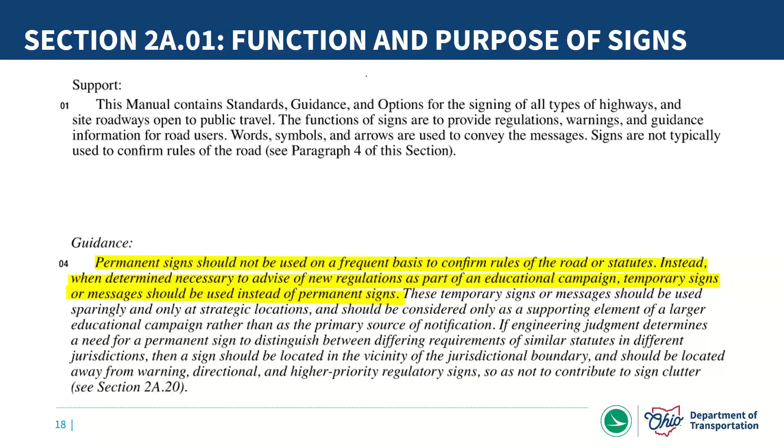Next slide here, this one just looks at the classification of signs. I color coded here with the highlighting. So you've got basically three categories or classifications of signs. You've got your regulatory signs—stop signs, yield, speed limit signs. You've got your warning signs, typically black on yellow or black on fluorescent yellow-green for school areas. And then the third major component is your guide signs—giving you destination information, directions, distance information to particular points of interest, that type of thing.

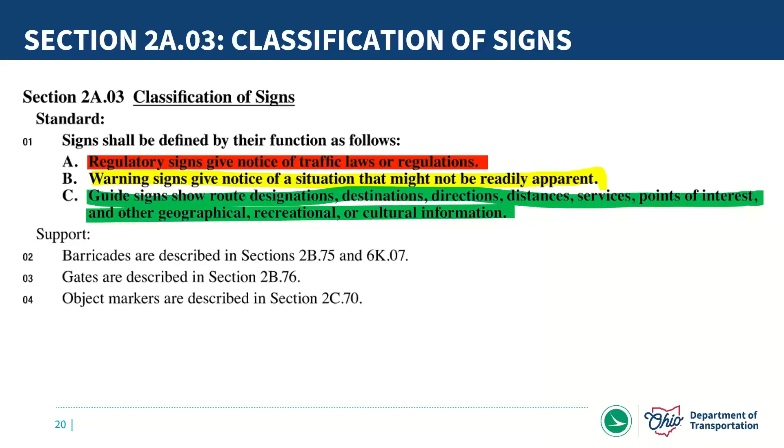All right, moving on—another part of that same design of signs section, 2A04. Pictographs are covered in that section, and the emphasis is you just need to be careful with the use of pictographs. You need to make sure you're reviewing this information if that's something you're trying to do that's not a pictograph already on one of the standard signs provided in the manual. Just need to be careful of that.

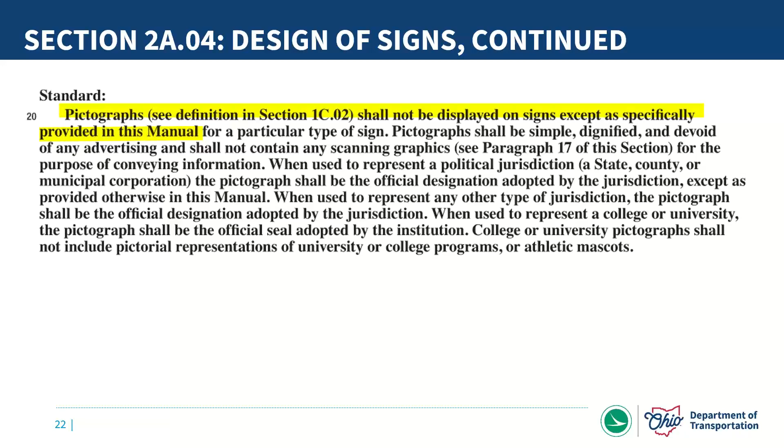The colors of signs - section 2A06 gets into all the different colors designated for different types. Not going to dive deep here, but I pulled this back in from part 1, just as a good refresher to show everyone the different colors and how they've been assigned for different uses.

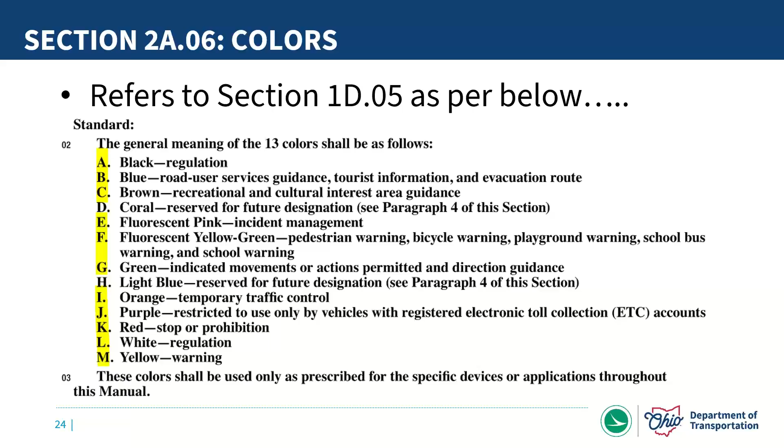This slide again talks about the dimensions of your signs, and this gets into being very dependent on the type of facility you're talking about. We'll take a closer look at some of the tables - there are tables in most chapters listing the different size requirements, which is a really handy resource for determining the size required for the type of road you're planning to put that particular sign on.

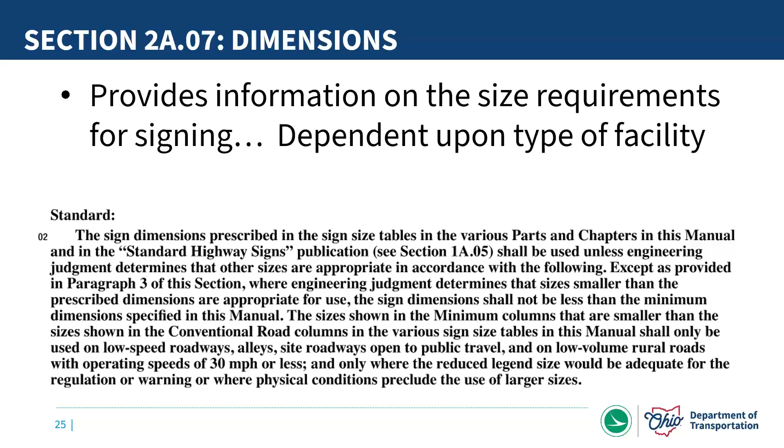Next section we'll talk briefly about is word messages, section 2A08. Nothing too earth-shattering here, it's pretty common sense type information - your word messages need to be horizontal, reading left to right.

The thing I thought was kind of interesting, and I'd never really heard this word, is solidus - I'm not even sure I'm pronouncing it right. So if you want to wow your friends and family, you can say you know what a solidus is. It's a slash - / - I always thought it was just a slash, but I guess it has a name.

Moving on, let's talk a little bit about symbols on signs. What's highlighted here is that standard symbols are typically oriented facing left, however it is permissible to mirror image those symbols if it helps convey information to road users. The example on this slide is a pretty common one you see at pedestrian crossings - on the left side you've got the mirror image, on the right is your standard orientation, just conveying that pedestrian traffic is actually walking out into the crossing area. You don't have to do this, but it is an option and it is permissible.

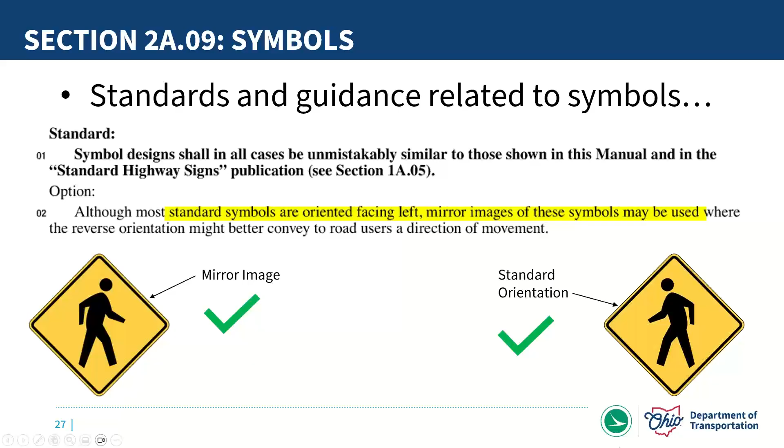Sign borders, just real quick - this section says your borders need to be the same color as the legend with distinct shapes. As far as the corners, all signs with the exception of stop signs are supposed to have rounded corners. Again, nothing here is any kind of significant change from the previous version of the manual.

Section 2A11 gets into enhanced conspicuity for signs. The real message here, if you dig deeper into this section, is there's a lot of mention of the use of engineering judgment - we talked in session 1 about the differences between engineering study and engineering judgment, so that's kind of the key takeaway here. If you start throwing enhanced conspicuity on practically every sign out there, you start to lose the effectiveness. So you want to give some thought when considering adding these additional items to make signs stand out, and make sure you're doing it for the signs that need it the most, not just every last sign or a big portion of them.

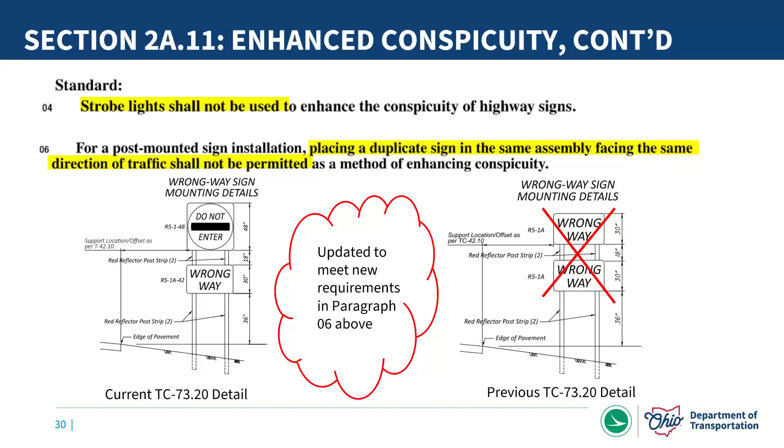Next section here just talks a little bit about the use of LEDs for conspicuity. The info I have highlighted here, and throughout this presentation, I pulled in some of the language from the MUTCD and or the Ohio Supplement. Obviously it would take way too long to read through all that, and nobody wants to hear me drone through that anyways. But I did try in some of these slides to highlight some of the things I felt were key pieces of information, or at least talking points as we go through this.

Next slide here, just want to take a look a little closer regarding that conspicuity. This slide is showing an example of a sign that does not actually meet the conspicuity requirements. In this particular case, the stop sign, what the manual is talking about, and I've got it highlighted below in the slide, is that there needs to be an LED along each edge of the sign in addition to each of the corners. So in this case, this stop sign would need some additional LEDs in between each of the corners to meet that requirement.

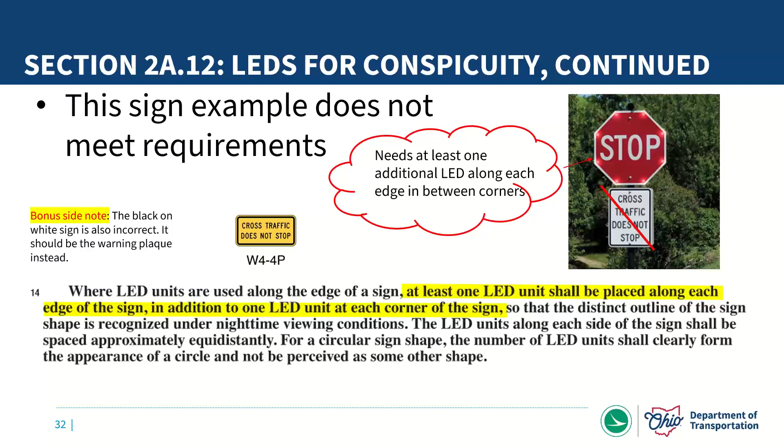Moving on, in 2A13, this gets into the standardization of location. What I highlighted here, and you're going to see very quickly that this is a theme throughout, is that there is definitely concern and a lot of emphasis in the manual about overloading road users, or in other words, sign clutter out on our roadways. It's an emphasis area in several sections of the manual, so you're going to see it here and in several other locations. It's definitely something to be thinking about as you're working through signing, getting the signing out there on your particular routes.

Here is just this slide. I wanted to pull up these couple of figures, 2A2 and 2A3, which are really good examples to show location as far as vertical height as well as offset locations. So some good reference information there.

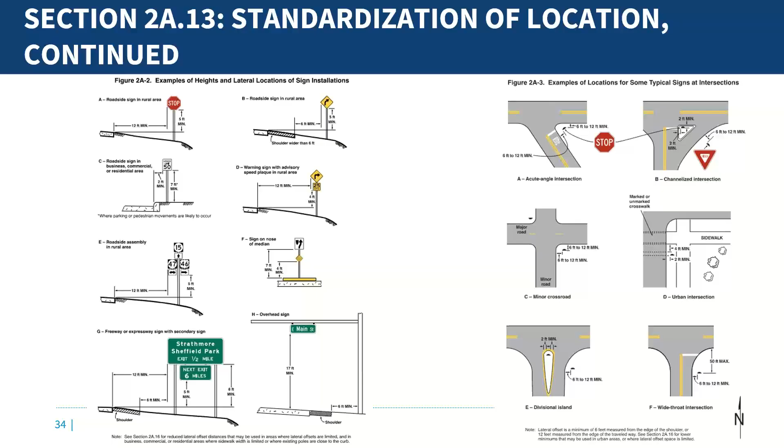Next section, next slide here, 2A14, talking about overhead sign installation. The manual gets into, there's not any standard language in this section necessarily, but there is some guidance information. And then there's also this option paragraph 3 that kind of lists out many of the scenarios where overhead signs are beneficial. So I just wanted to point that out to folks.

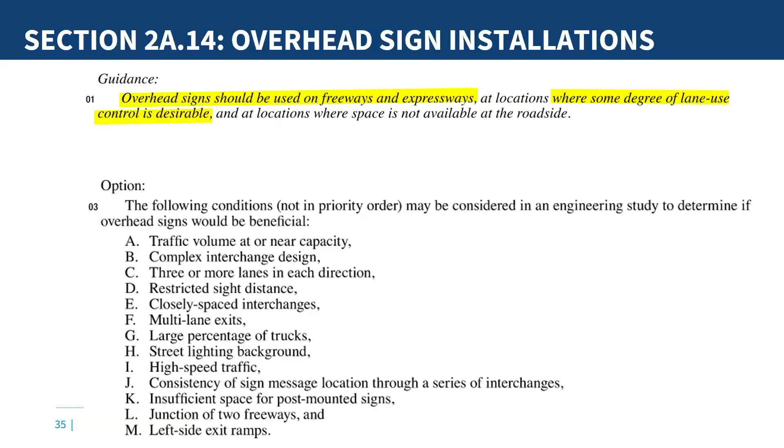Next, real quick, let's look at lateral offsets again. Those figures we saw a few slides ago do a good job of giving you the basic information, and this section dives much deeper into it. I wanted to point out the highlighted info here: post-mounted signs and object markers need to be crash worthy if they're within the clear zone. This is very important for keeping sign installations safe in case of a crash where someone goes off the roadway. Also, our TC standard construction drawings, TC 41.10 and 41.20, show in more detail the ODOT requirements for post and beam support type information.

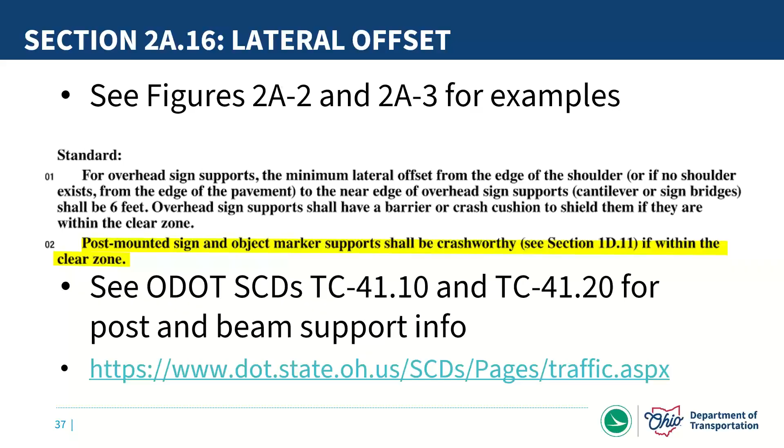Moving on to posts and mounting. What I highlighted on this slide is reiterating that when you're getting signs installed, with any posts or mountings or additional things on those signs, make sure you're not inadvertently obscuring a sign, like a stop sign, so that people can't see its actual shape, because that is very important information for drivers.

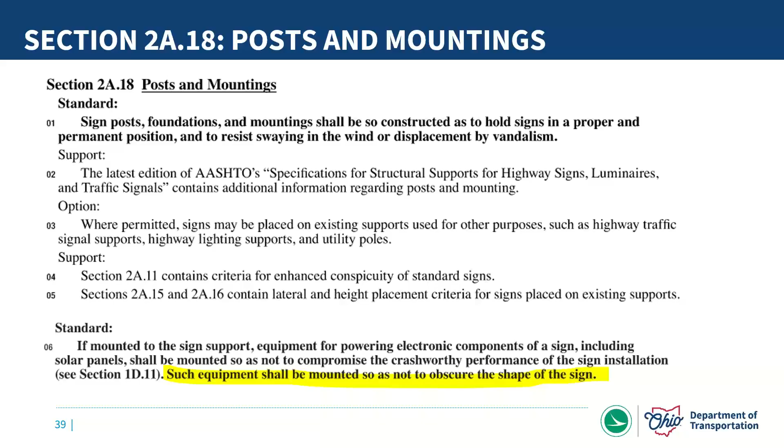Section 2A20, again like I said previously, this will definitely be a theme - there are multiple slides and sections of the MUTCD that get into this - talking about excessive use of signs. I want to reiterate that the previous section, 2A13, gets into the priority of signs and recommendations for folks to prioritize different types of signs, with some type of process in place so you can avoid sign clutter type issues.

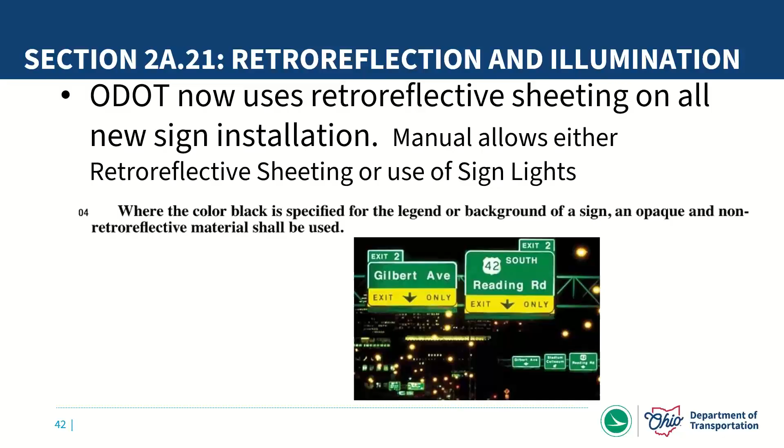One other bonus piece of info you might use to wow your friends and family at your next cocktail party: the unit of measure for retroreflectivity is candelas per lux per square meter. Hit them with that and they might tune you out completely, but that's how retroreflectivity is measured for signs - it's a different unit of measure than when you talk about pavement markings.

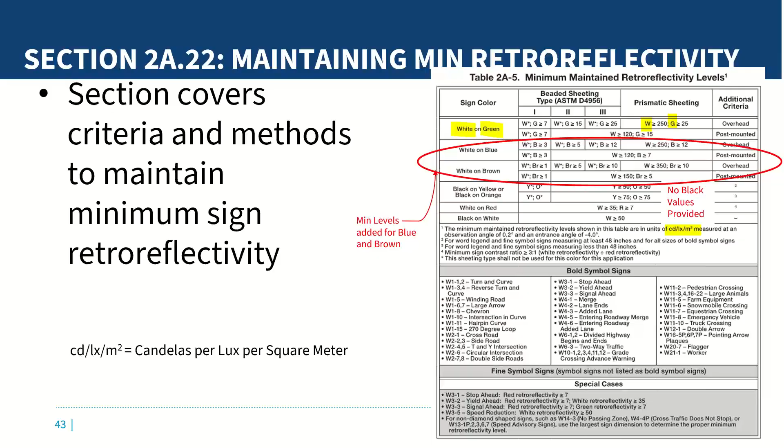Moving on, we're going to jump into Chapter 2B. For the remainder here, at the beginning of each chapter there will be a slide that shows all of the sub-chapters or subcategories within that chapter. If there is content that will have a slide associated with it, those are going to be highlighted pink. If there is a section that is in the Ohio Supplement, that'll be highlighted yellow. For every portion of parts 2 and 3 that are in the Ohio Supplement, there will be a specific slide that digs a little deeper into that and shows what that is, and maybe talks a little bit about why that is.

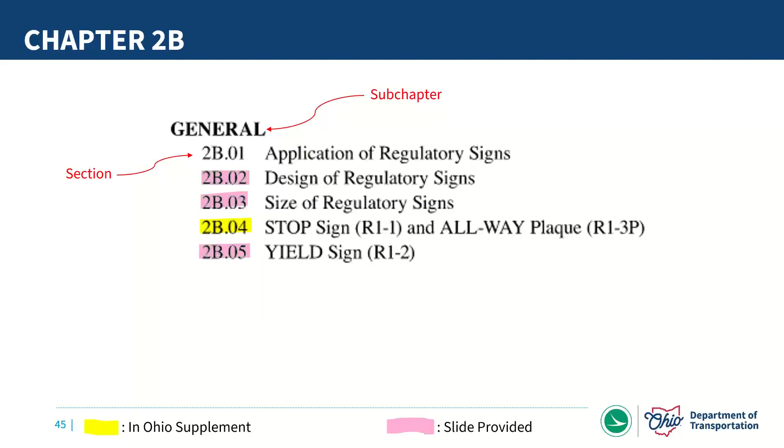So moving on, section 2B02 gets into the design, and in this chapter 2B we're talking regulatory signs. Nothing too earth-shattering here, but I wanted to highlight that if you are incorporating any regulatory signs in changeable message signs, we have that technology now to display full signs on your changeable message boards. You need to make sure that if you're doing that, those signs are set up and sized appropriately, meeting whatever the typical sizing, shapes, and colors need to be for a message board type application.

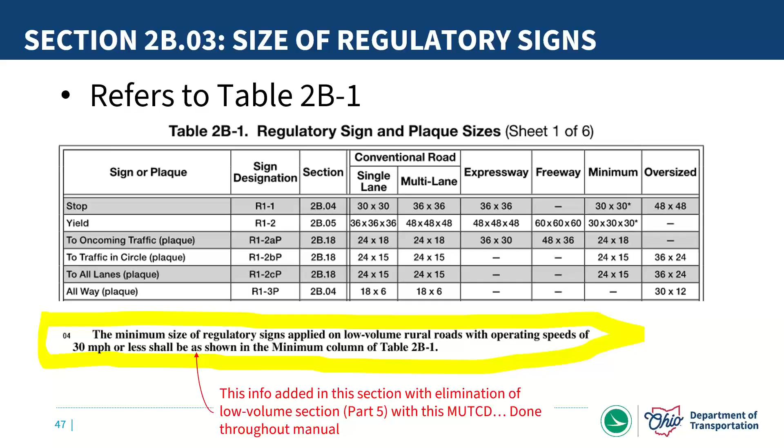Section 2B04 actually gets into a section that is in our Ohio Supplement. A couple things I wanted to point out about this particular section. Of all the regulatory signs, stop signs is the one sign, I believe, in the manual that is not permitted to be part of a changeable message sign. That's new content added, since advanced changeable message signs were just kind of coming online back with the previous manual. So just be aware, stop signs are a no-go on changeable message signs.

As far as the Ohio specific content that's in section 2B04, that has to do with our ORC, Ohio Revised Code, section 4511.43, which restricts any kind of turn at a stop intersection. So the EXCEPT RIGHT TURN plaque that the MUTCD talks about is just something that, based on Ohio law, doesn't work. So we took that section out of the Ohio Supplement.

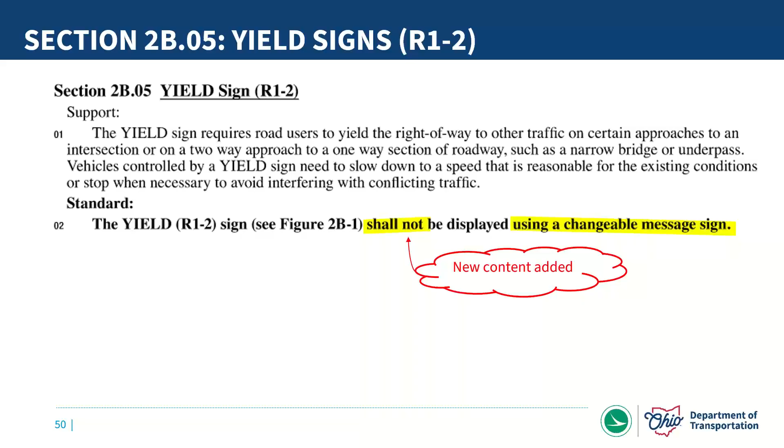Just to clarify, moving on, this section is basically signing for right-of-way at intersections. There's some pretty important information in here, so we're going to hit on this with slides for all of these. We'll probably move through these fairly quickly to keep things moving, but I do want to hit on them briefly. As far as general considerations, the thing to point out here is in paragraph 4.

It lists off the different types of right-of-way control, from least restrictive down to most restrictive. So as you're taking a look at your different unsignalized intersections, this gives you the criteria to be taking a look at, again from least restrictive to most restrictive.

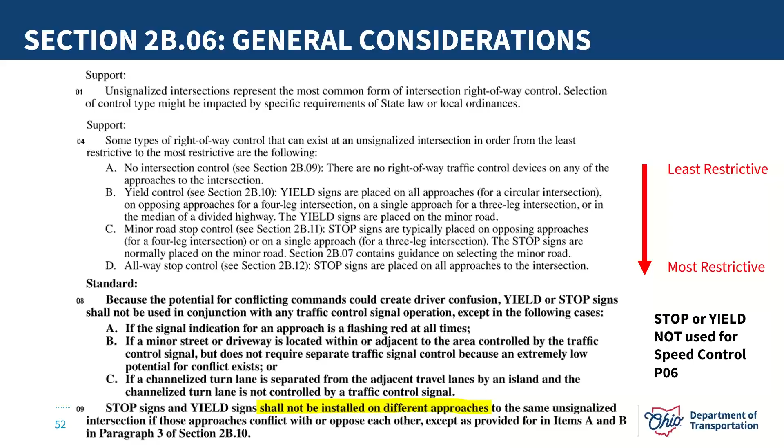2B07 talks about your determination of the minor road. I'm not going to read through all of this, but when you're looking at your unsignalized intersections and trying to determine your traffic control type, this is some of the information you need to go to.

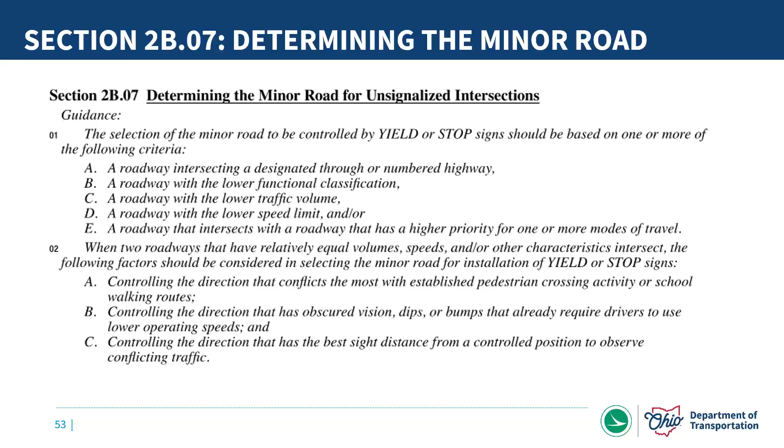Similarly here, your right-of-way at different intersection controls and the considerations. This is a partial list. It's an even bigger list that's in the actual manual when it gets into this topic of right-of-way at intersections.

The next one talks about the use of no intersection control, and again it's based upon engineering judgment, and this needs to be also based on some of the factors listed here on this slide. Not going to go through all of those in the interest of time, but this section is definitely a portion of the manual that folks determining traffic controls at intersections need to be aware of.

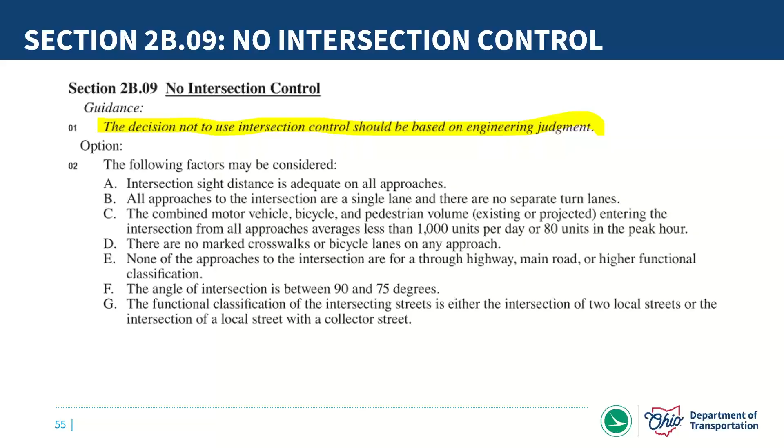This section talks about your yield control, and again most of these sections discuss the use of engineering judgment. Also wanted to point out that yield signs are not to be placed on all of the approaches to an intersection. The only exception to that is roundabout type intersections.

Here, minor roads, your minor road stop control. Again, just pointing out, it's like a broken record here, but engineering judgment, the manual, it's a very important consideration. Engineering judgment needs to be part of your decision making.

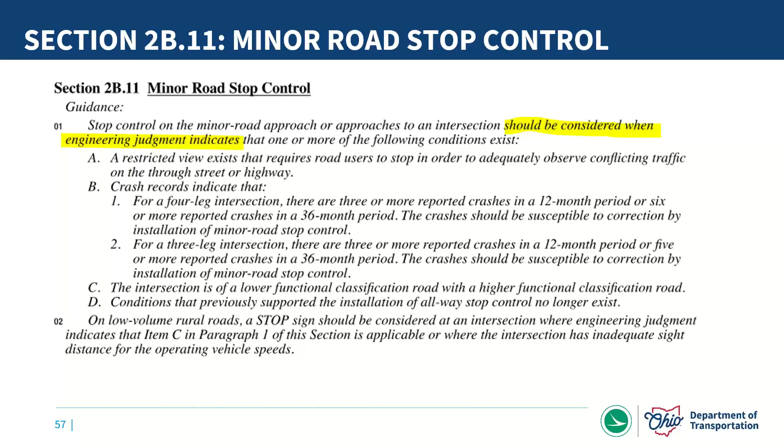Then this section, 2B13 through 2B17, I just listed those off real quickly, and wanted to point out that the new MUTCD does reorganize some of this information when it comes to these warrant criteria. So just be aware of that.

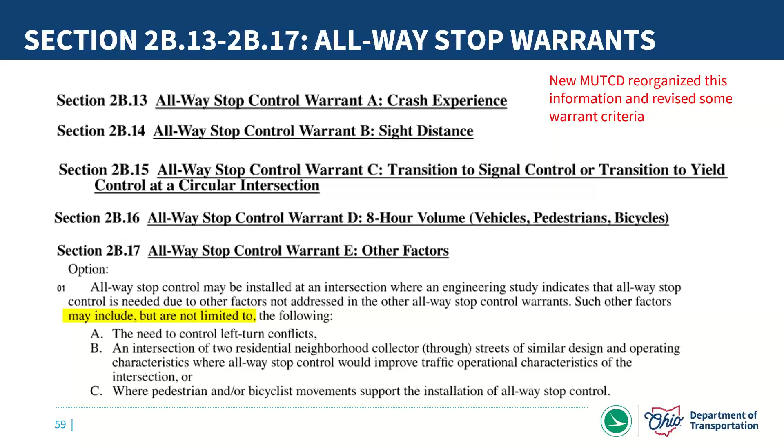Section 2B19 is in the Ohio Supplement. This section gets into Ohio's approach, as far as yielding or stopping in interactions with pedestrians. Ohio, the way the law is written, is a yield state. Some states are stop, some are yield. So what we did here is take out the mentions for signs associated with the stop condition, which is why this information was pulled over into the Ohio Supplement.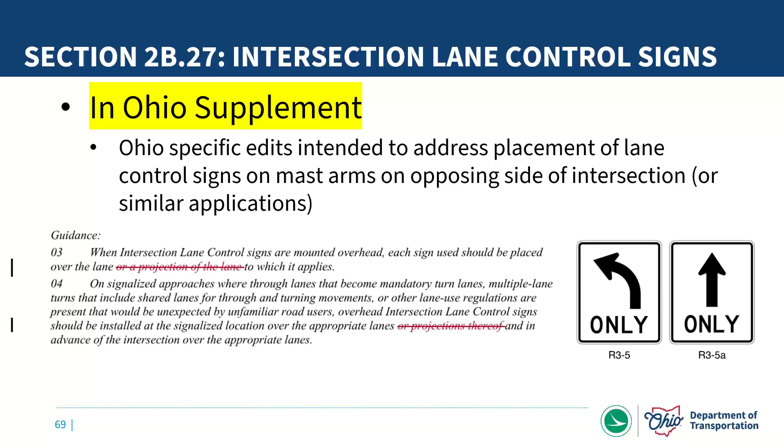Similar here, the same type of thing. We also want to clarify the prohibition of placing some of these types of lane control signs at the far side of the intersection. So it's the same reasoning that this section is in the Ohio Supplement as the previous section. This next slide will illustrate that.

Again, this section 2B29 just gets back into that again, talking about mounting of these on the far side of the intersection.

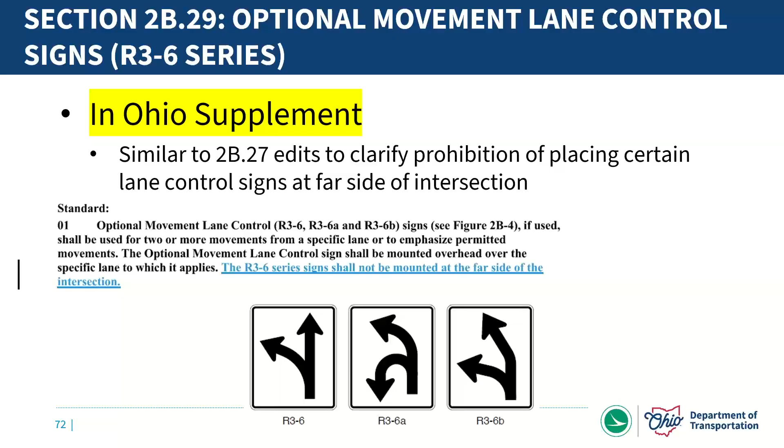Something to point out here is that with Revision 1 of the National MUTCD, this section being part of the Ohio Supplement will actually be going away. We'll be getting that updated because they made that change with their new revision.

Moving on to the section on passing, keep right, and slow traffic. Just one section I wanted to hit on here, 2B38. And also just to point out real quick, there is a new section here, 2B44, new to the manual.

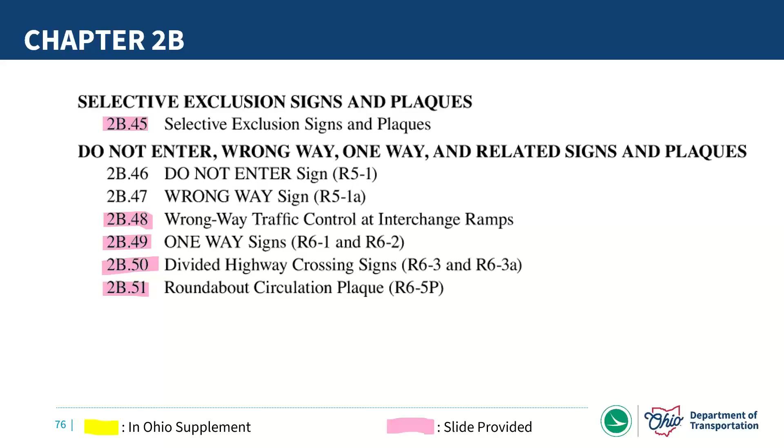Moving on, we'll talk some about selective exclusion signs, and then move into the subsection that gets into your do not enter, wrong way, one way, etc. signs and plaques. So we've got a handful of slides to hit on here.

This slide talks about your selective exclusion signs. The point here is to note that it's important there is a state or local statute or ordinance in place before you go out and put these signs up. In other words, just by the act of placing some of these signs doesn't make them enforceable. Sometimes we do get that question come up from time to time, so I wanted to point that out.

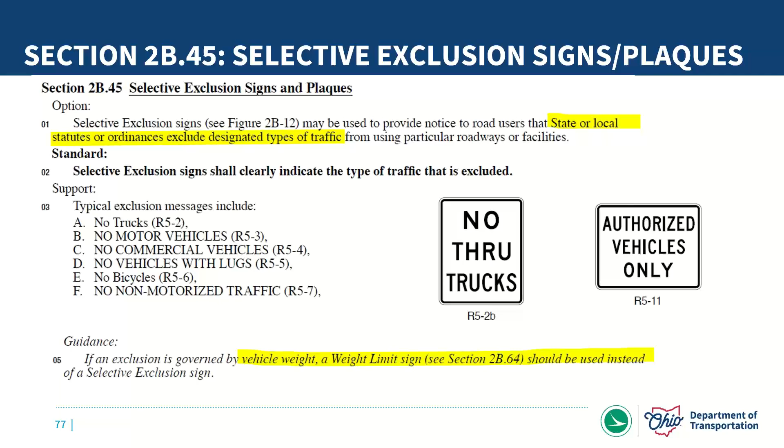Section 2B48, I put this in here because it gets into the treatment of wrong way traffic control at your interchange ramps, and I wanted to point out that we do have an ODOT standard construction drawing, our TC 7320, that provides a typical layout for the signing associated with that. Also, that standard construction drawing isn't used at every last interchange. You need to exercise engineering judgment or an engineering study to make sure that is an appropriate location for those additional signs.

Section 2B49 and 50, again, just some of the other signs that this section covers: your one-ways, your divided highways. This refers back to the section that talks about how to determine how you treat a divided highway, with regard to the traffic controls, whether it's a single intersection or two independent intersections, depending on some of that criteria.

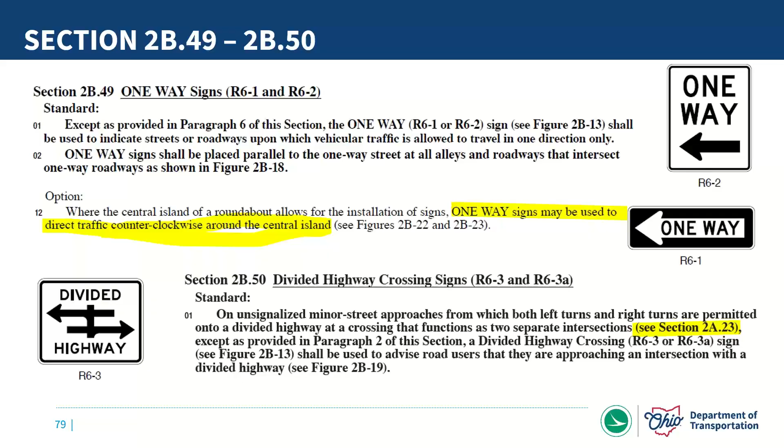Moving on within Chapter 2B, we're still talking regulatory signs. So we're going to talk a little bit about parking, standing, stopping signs, and then also some pedestrian signs. We've got one section that is in our Ohio Supplement, that's 2B53, and then a few other slides we're going to look at as well.

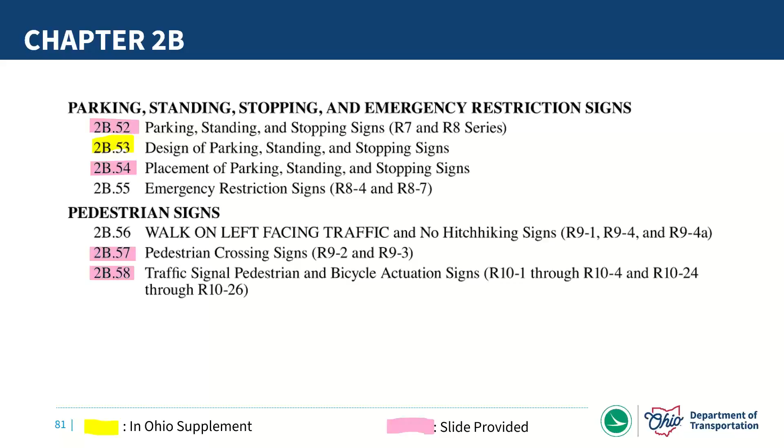So, parking, standing, and stopping signs — this gets into some of the signage associated with those issues.

Moving on, 2B53 — this one is in the Ohio Supplement, and the reason being is that ORC, Ohio Revised Code, has some specific requirements for fines associated with reserved parking for handicap spaces. There's some specific requirements for fines, so we have an Ohio specific sign, and we address that in this section.

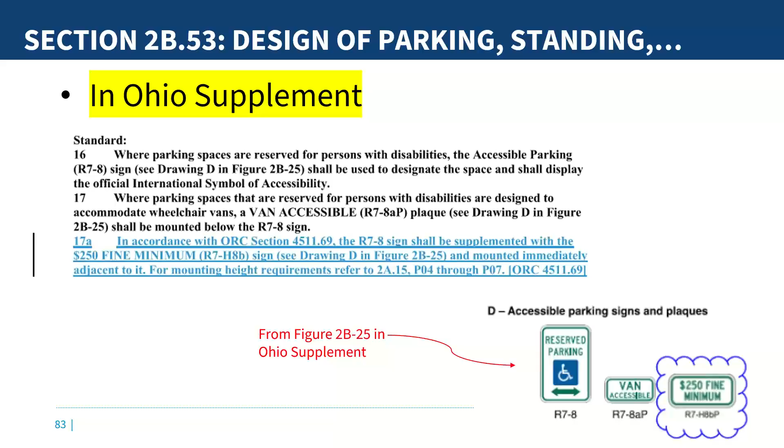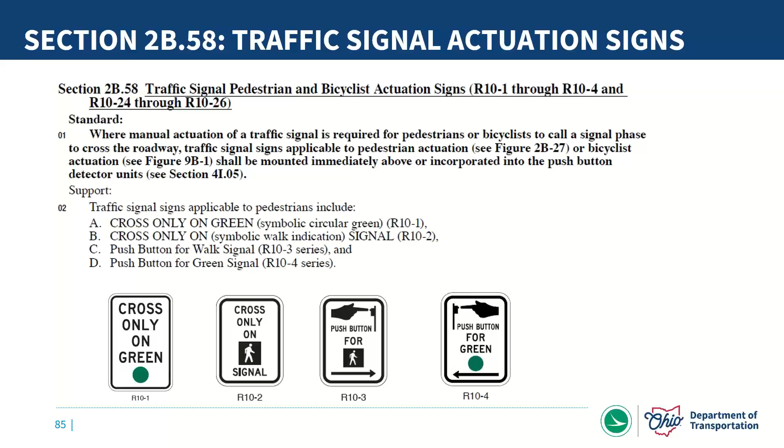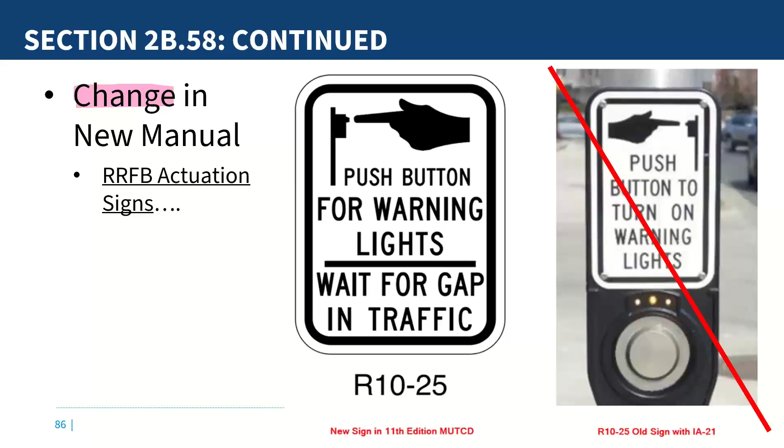Moving on, getting into traffic signals and then some of your road closed, weight limit type signs. We've got 4 sections here that are part of the Ohio Supplement, and a couple others we'll take a quick look at with some slides.

2B59 — this particular section is in the Ohio Supplement, and again the reasoning for that is the right of way of pedestrians and how the ORC handles that, and the fact that in our state at least, we would not be using stop signs, we'd be using yield signs.

Another thing that was added to this section is paragraph 13A here — this is a sign we wanted to specifically call out that in cases where we've got flashing yellow arrows at our signals, we want this sign installed at that signal location for a minimum of 5 years. That's because, as more and more of these flashing yellow signal locations are out in the field, we want to make sure the signage goes along with them, since it's still a relatively new thing being done here in Ohio.

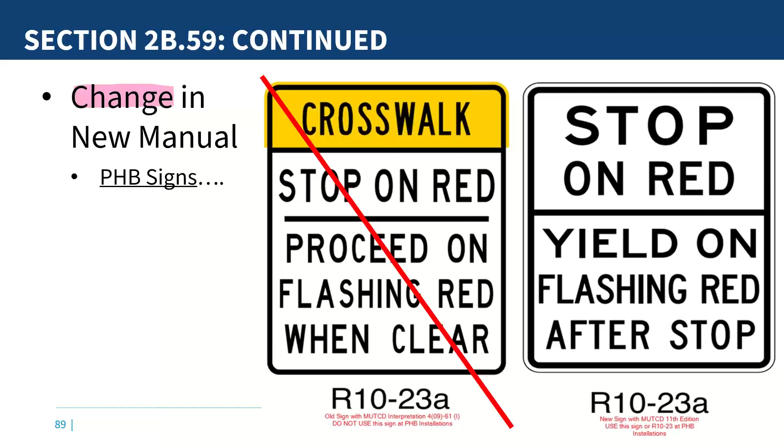This slide, looking at 2B60 and 2B61, really just points out the use cases for the no turn on red sign, with the symbol and without the symbol, and when each is intended to be used. Also, on the left-hand part of the slide, if you look back at the previous manual, these signs did not change, but what did change is the sign code associated with them — for some reason these were flip-flopped between the previous manual and the new manual. So just something to be aware of.

2B63 — this is also Ohio Supplement content, and this one gets into the Ohio specific sign we have for use when you've got high water situations. Again, for more detailed information on these Ohio specific signs, we want to direct everybody to make sure they're checking those out in our SDMM.

Section 2B64 gets into weight limit signs, and this is important. It's in the Ohio Supplement, and this particular sign is new, an Ohio-specific sign. Based on feedback from our colleagues at FHWA, we had to work through this to make sure we provided a sign that met their requirements. So this is the sign we ended up with for Ohio-specific weight limit signage. If you've got posted structures, you need to be aware there is a slightly different sign, and we're going to take a deeper dive into that here.

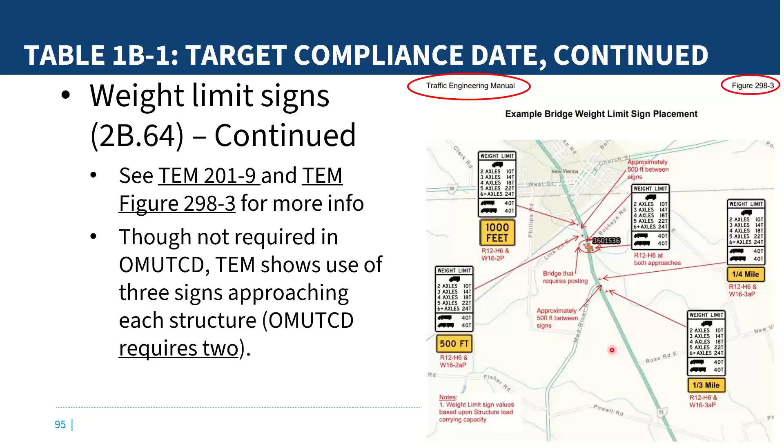Moving on to section 2B65, we're talking about weigh station signs. This one is also in the Ohio Supplement. The federal sign is here, but we're not going to be using that. Instead we have two Ohio-specific signs, shown here. There are also some additional regulatory signs we'll talk about, and three of these sections show up in the Ohio Supplement as well, which we'll take a look at.

Photo enforced signs are not in the Ohio Supplement, but there has been some new information added into this section of the MUTCD. Just wanted to point this out for folks — Ohio, you've got to be careful on the use of these. I'm not going to take too much of a deeper dive there, but we do have some additional information for you in our TEM, section 201-14.

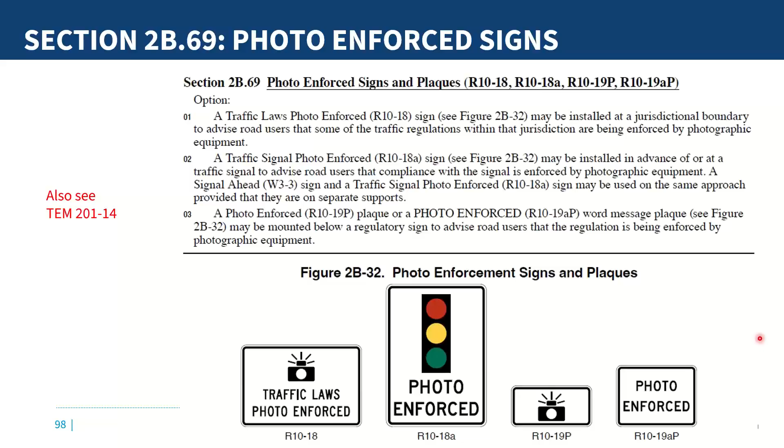Section 2B71 is in the Ohio Supplement, and this talks about the move over sign that we've developed. There was some Ohio Revised Code language that guided us in developing this sign, to make sure we met the intent of that language. This section addresses that, and the sign itself shows up in figure 2B33 within the Ohio Supplement as well.

Similarly, the no handheld phones sign was developed based on the language in the Ohio Revised Code. This is what is to be used here in Ohio if this sign is applicable, and again our TEM provides additional information on the use cases for this sign.

And also here, this is the last of this section 2B. Again, the reason this is in the Ohio Supplement is just that we have an Ohio-specific sign that addresses this instead of using the standard federal sign. So this just points that sign out and provides the ORC reference for the background on the use of this sign.

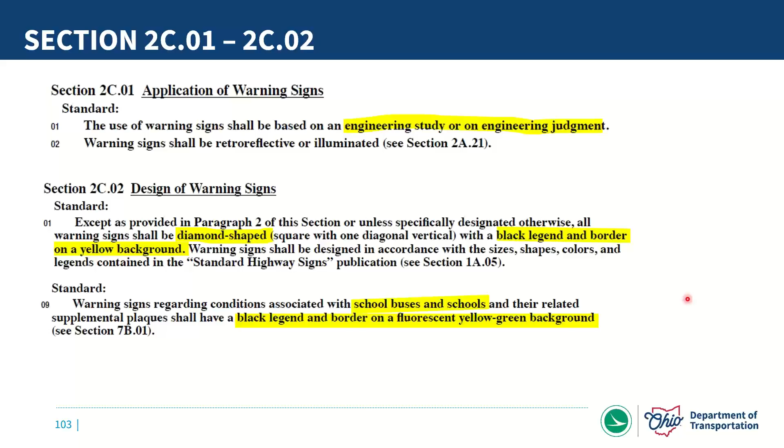Here, similar to the section 2B at the beginning of 2C, you've got this table of sizes, the different type sizes based on your uses, the types of roadways that these signs are going to be placed on. So again, a very good reference resource. And again, in the Ohio Supplement, we did not pull any of these tables over. So just be aware of that.

This slide here, wanted to pull this one in - not in the Ohio Supplement, but it is important to point out - this table, I've got the new MUTCD table, it's 2C-3, on the left-hand side of your screen here. And then on the right-hand side is the old, previous table from the previous manual.

The thing to point out here is there's been some pretty significant changes to this table with regard to the use, and in particular, like I circled here, in your stop condition, these distances have all increased. So this goes back to make sure when you're evaluating the placement of these warning signs that you're checking it against these updated guidelines and not just replacing in kind, because the recommended distances for replacement have changed - and in most cases, pretty much all cases, have increased. I circled this column, but there is some impact all throughout here, so just be aware of that.

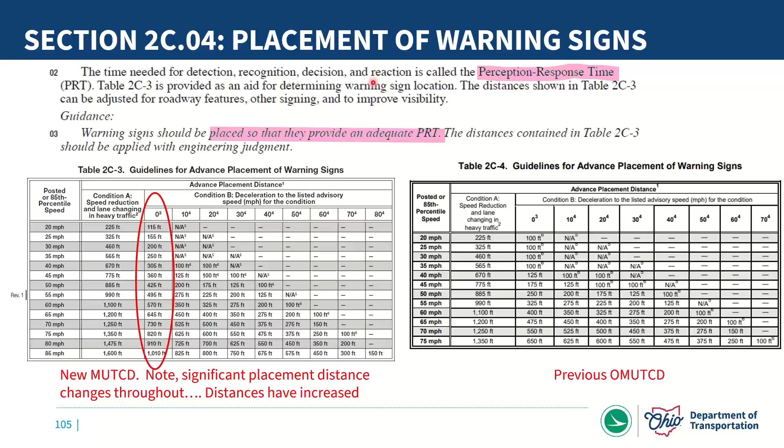Moving on, Chapter 2C gets into our horizontal alignment warning signs. So I've got a handful of slides. None of these are Ohio-specific content, so they're not in the Ohio Supplement, but a few things I did want to touch on here.

This one, Section 2C06 - really the big thing here I wanted to point out is the table in the new manual that gets into the criteria for the use of signage for changes in horizontal alignment. These tables have completely changed from what was previously in the manual. I think it's a little easier, in my opinion, to work through these. So I think it's a good change, but I just want to point out that it has changed from the previous manual.

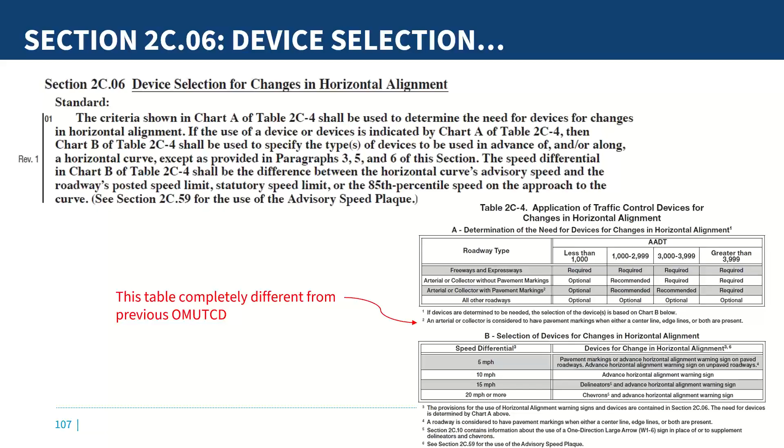Again, this is not something you have to rush out and immediately rectify, but it is something that you need to be aware of. If you have a project going through, or just scheduled maintenance, that type of thing, you need to be getting rid of these chevron alignment signs. The concern was there seemed to be a lot of misuse of those, and the other circulatory roundabout signs are just more appropriate. In this manual, this use case has been completely eliminated.

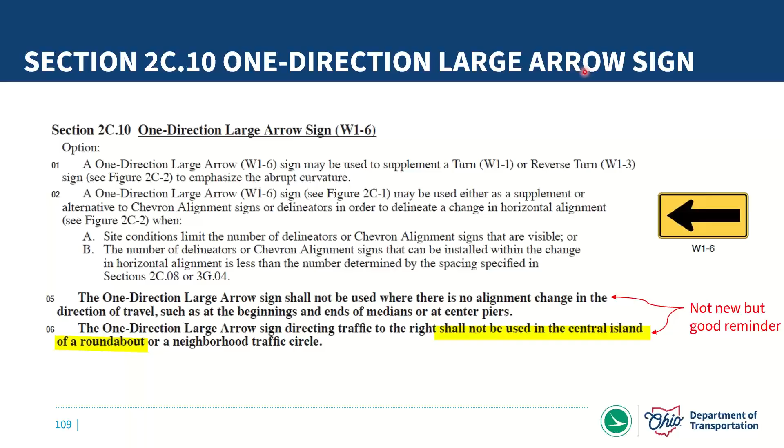Section 2C10, this gets into your one-direction large arrow signs. Nothing too significant has really changed here, but I want to point out that I've seen these used in a few cases in center islands of roundabouts. That was actually not even permitted in the previous manual, but it's something I've seen on occasion out driving about.

Moving on here, we've got our vehicle speed feedback signs and plaques. This is pretty important. This information is completely new in the national MUTCD. Previously there had been a little bit of information, but it was just through some interpretation, and I think a lot of people missed that with the previous manual. So the new manual has pretty much reined this in and is very specific as to the use cases for these vehicle speed feedback signs.

Basically what it amounts to is that if you're going to be using the plaque, in all cases you need to have the regulatory speed limit sign up above it, or if it happens to be in a school speed zone, then that school speed zone regulatory sign up above it. In the case of this standalone sign, the only use case is to be used at points of horizontal curvature, just to provide, if a speed reduction is needed, a display of driver speed as they approach that change in horizontal alignment.

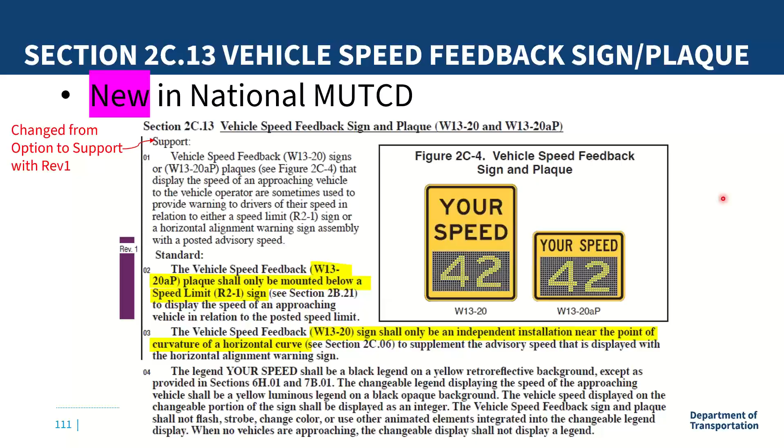This slide shows a few examples of some of the things that are now prohibited with this new information. The only thing that's supposed to be displayed is the actual speed, and it's supposed to be in the same color as the background of your sign. So it's supposed to be yellow in this case, and only the speed - none of the slow down messages. In this case here, this is black on white, that's for regulatory purposes. This is a warning purpose, so this is no longer allowed.

And similarly here, you've got multiple messages - this is no longer allowed. So please be aware of this change. I know these signs are popular with a lot of folks, but there is definitely some concern about making sure they're being used consistently, and that's the underlying purpose of this MUTCD, the uniformity of use.

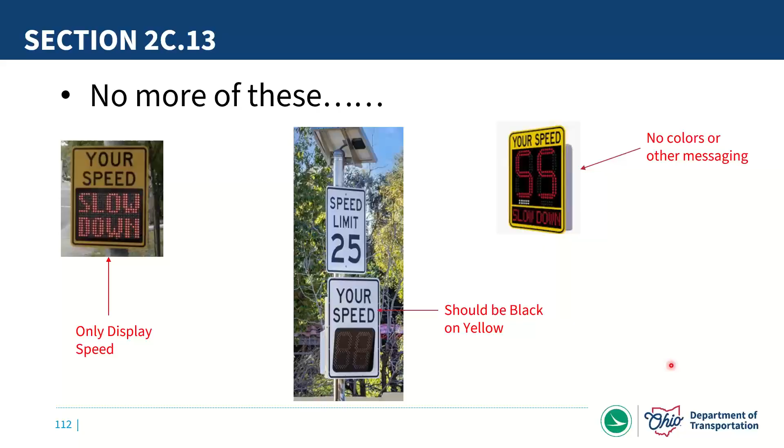Moving forward here, we're going to take a quick look at just one section within the vertical grade warning signs and the roadway geometry warning signs. Just one - we're going to take a look at one section. This one actually has some compliance dates associated, so this is also an important one to be keeping in mind.

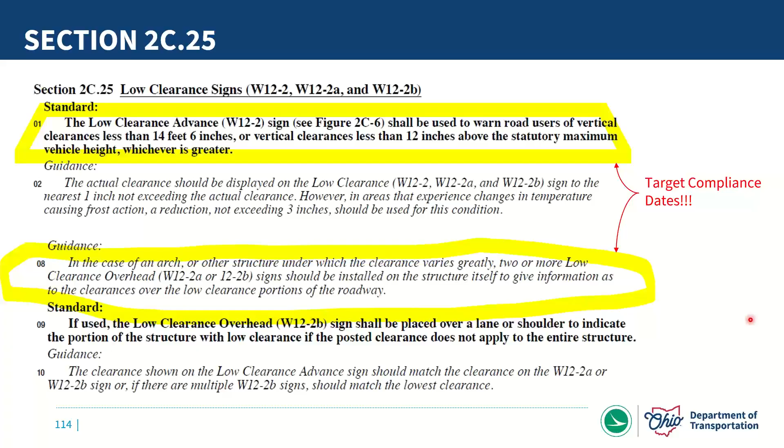Low clearance signs, section 2C25. This one, again, has target compliance dates associated with it. What I've got highlighted here are the two paragraphs that are specifically mentioned in the target compliance date. So again, if you're responsible for upkeep of your sign inventory in your agency, this information is definitely important for you.

Moving on, we're going to take a look at the no center line section, 2C32. It is in our Ohio Supplement, so we're going to take a look at that next here.

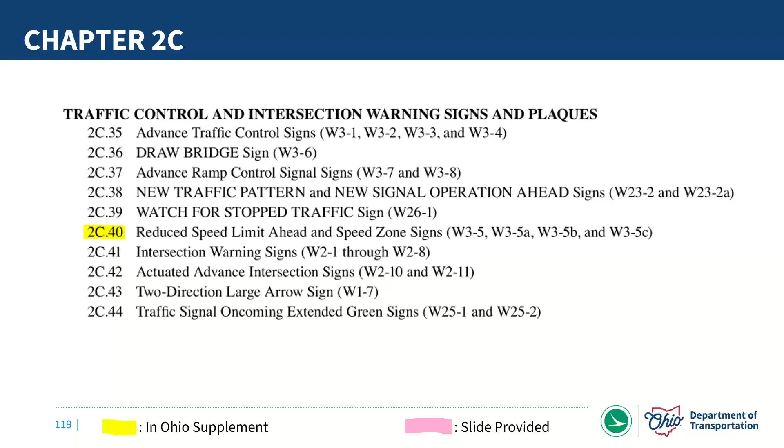Moving on, still in our warning signs section, we have 2C40, which is part of our Ohio Supplement. The reason it's there is that the way Ohio law is written within the Ohio Revised Code, we don't have provisions for truck speed zones specifically. Because of that, we did away with the use of this warning sign about an upcoming speed zone for trucks. We just don't have that regulatory authority.

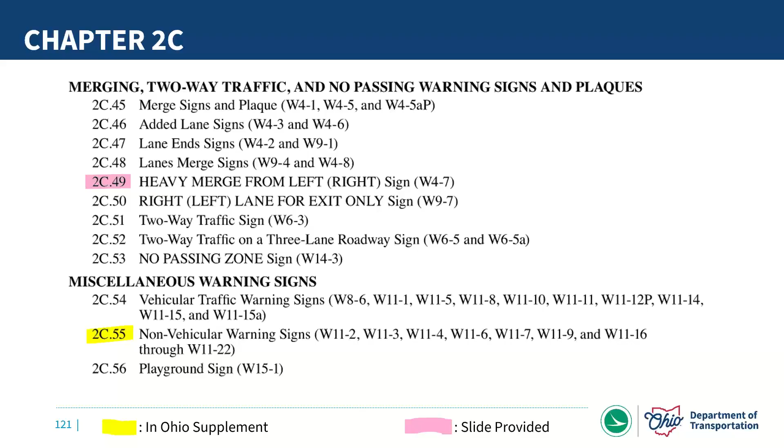Moving on, I want to take a quick look at a couple of sections, one of which is not Ohio-specific and one which is. We'll look first at the heavy merge from left sign, which is new and part of the new manual. The primary reason for this slide is just to point out that this is a new sign not in the previous manual, and this section lays out the use case. Previously, in a lot of cases there would be use of the 'through traffic keep left' sign. Now, if you have this heavy merge situation, this sign has been designated for that use case. If you want to take a deeper dive, the MUTCD disposition document, which I referenced at the beginning of this session, talks more about the use case and reasoning.

The next slide covers non-vehicular warning signs. The reason this one is in the Ohio Supplement again goes back to the distinction that Ohio is a yielding state rather than a stop state. So as part of our supplement, we struck out the indications for stop here for pedestrians and instead just referred to yield.

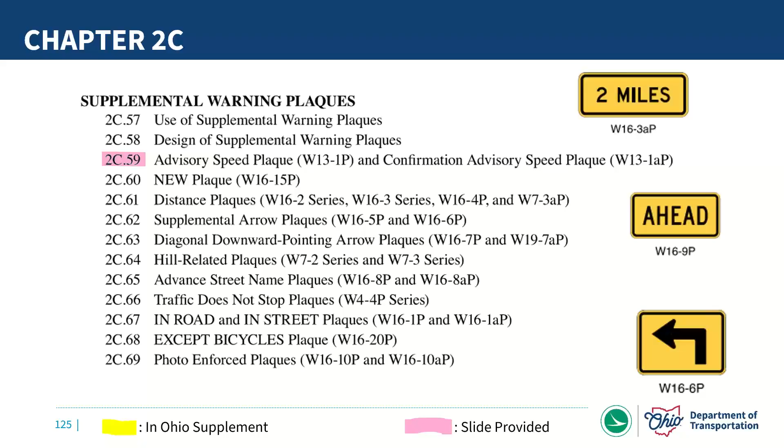Chapter 2C, the object markers section—I'm not going to have specific slides on this. I just threw in pictures of the different types of object markers that these sections talk about. If you have a use case for these object markers, you can find more information here in these sections.

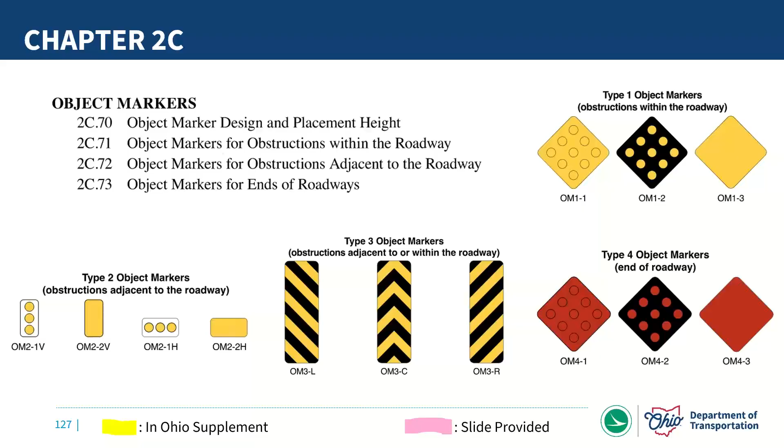Abbreviations, just threw this slide in here to illustrate some of the words or descriptors that you're not supposed to abbreviate in your sign legends, and then some that it's okay to provide abbreviations for, and in some cases you may need to fit in the space.

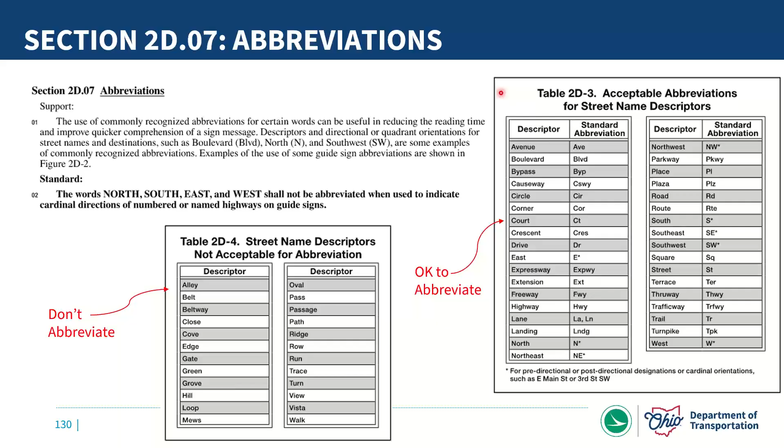Moving on, let's take a look at section 2D11, which gets into your route signs and auxiliary plaques. This is a section that is in the Ohio Supplement, so we'll take a little closer look at that.

In section 2D11, design of route signs, a reason that this is in the Ohio Supplement is that we have an Ohio specific sign for use for township routes. For some reason the national MUTCD does not have that, so we had that in our previous manual, and that's remained in our new OMUTCD Ohio Supplement.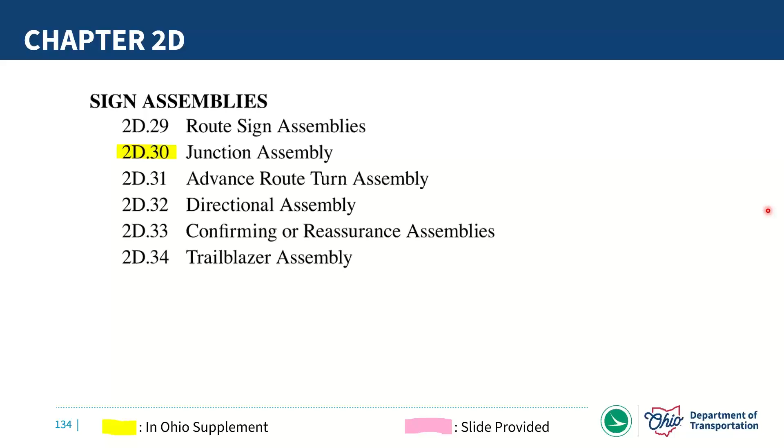The thing to point out is that the previous manual had some language about additional clarification on the use of junction assemblies. We had to change that language a little bit here in our Ohio Supplement, but it provides some additional information as to when these junction assemblies can and cannot be omitted. It also refers back to another section, 2D29, that gets into a little bit more info, and that's just a snippet from that section provided at the bottom of the slide.

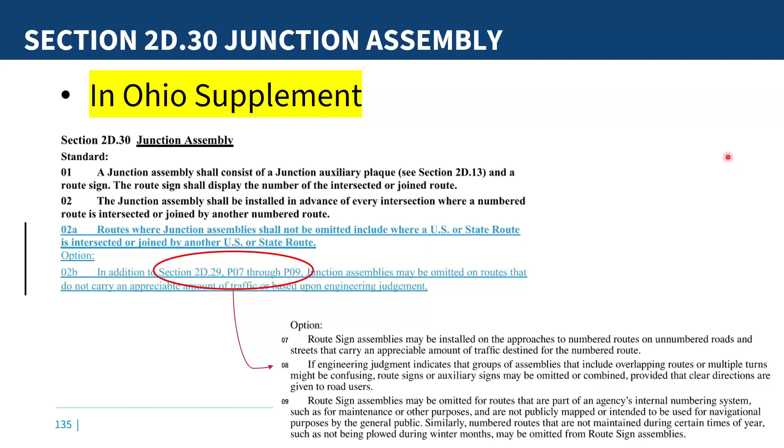Chapter 2D - there are a couple of new sections under the street name and parking signs that have been added into the Ohio Supplement. Those get into the expressway street name signs, and then the expressway at-grade intersection advance signs.

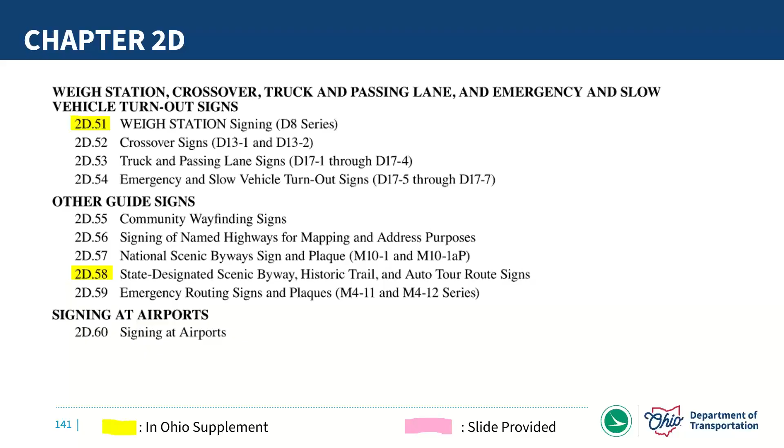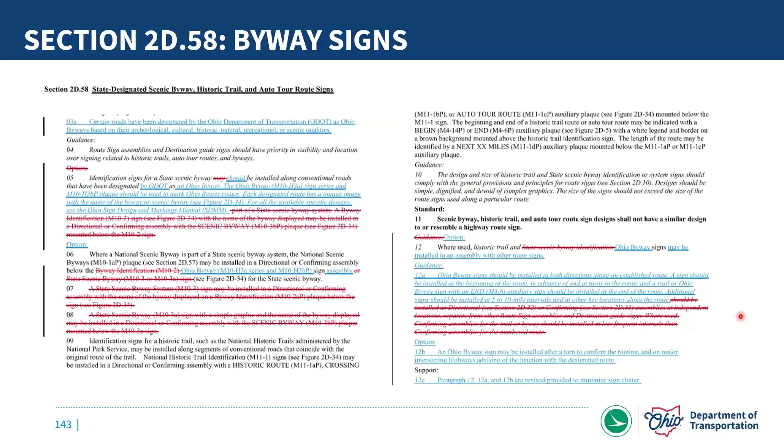Section 2D58 gets into byway signs, and there's a lot here. There was a lot of Ohio specific changes. I don't expect you to be able to read all that, but you can take a closer look to get into the details. The next slide kind of illustrates it. Basically, Ohio has come up with some Ohio-specific signs for all of the Ohio scenic byways. The information associated with those is part of the Ohio Supplement, and we've got figures that illustrate the use of those Ohio-specific byway signs.

Moving on, guide signs for freeways and expressways. Obviously this is an extremely important use case, the guide sign usage, but in the interest of time I don't have any specific slides here, but this is all of the sections associated with this area.

Moving on further into 2E under sign design, we'll go back to freeways and expressways. Nothing in this first subsection under general, but once we get under sign design, there are a couple slides we're going to take a look at, one of which, 2E13, is within our Ohio Supplement document.

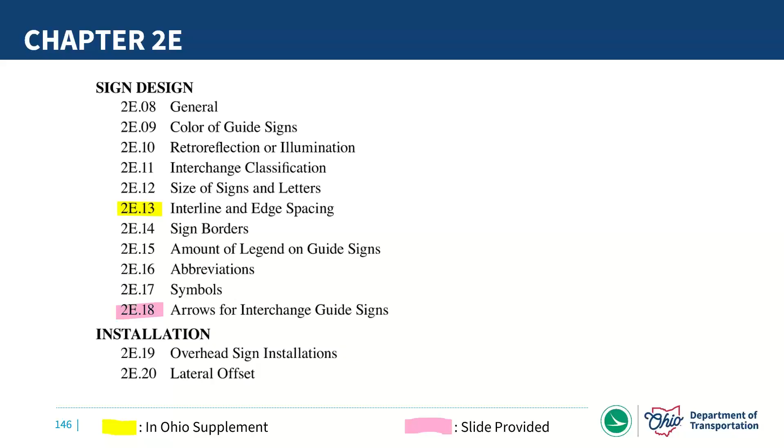Here is a look at 2E13, and the underlying reason for these language adjustments was just to try to simplify the determination of the interline and edge spacing compared to how the national manual had things set up. We had similar type language in the previous MUTCD.

This section is not an Ohio specific item or anything in the Ohio Supplement, but it's something we wanted to make sure we emphasized. The previous manual even addresses this, but we still have some occurrences of these slash, diagonal arrows on some of the overhead signs throughout the state. This is an emphasis area for us because they have led to some confusion for motorists.

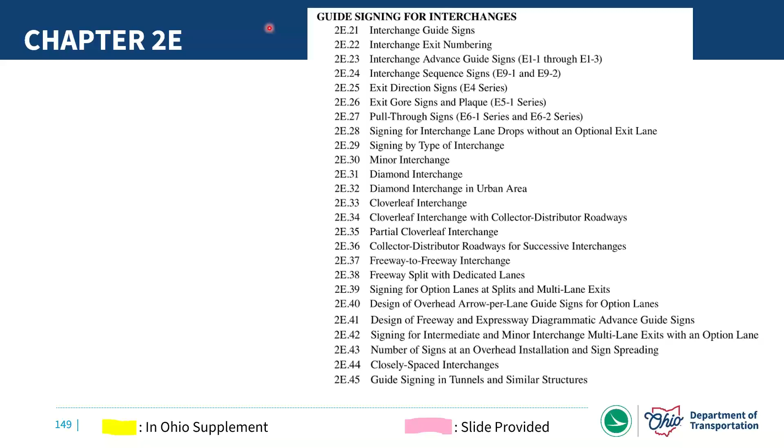Moving on, this next subsection is a big one: guide signs for interchanges. I don't have any specific slides to hit on here, but again, if you have a project or are doing some maintenance or rehab that includes these types of signs, these are the sections where you're going to need to go to find that information.

Moving on into some of the other guide signs, we'll take a look at section 2E51, our supplemental guide sign section that's within our Ohio Supplement. I'm hoping everybody has recognized by now that any of the slides addressing the Ohio Supplement content have big yellow-highlighted letters at the top noting it's that particular section's Ohio Supplement, so if you're scrolling through these slides at a later date, those will jump out at you.

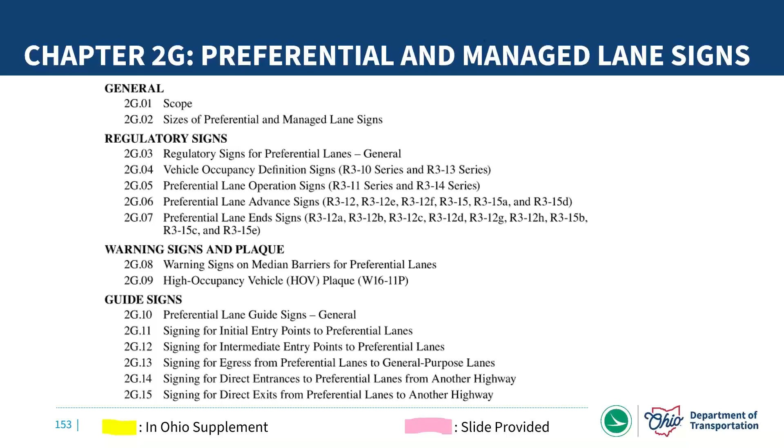One thing I did want to point out in chapter 2G, which covers preferential managed lanes, is that there are several new sections added that get into the details of signing for part-time travel on a shoulder. The ODOT terminology we've used for some projects here in the state is smart lane projects or hard shoulder running projects, but traffic control criteria for those wasn't part of the previous manual. Now there is some information on that particular use case.

Moving on into general info signs, we've got a couple slides to look at here. One's an Ohio specific thing in our supplement, and one I just want to point out a couple things on.

The jurisdictional boundary sign section 2H02 is in the Ohio manual because we have a few additional Ohio-specific signs for use when entering or leaving corporations that aren't addressed in the national manual. This was in our previous manual, and we just carried it over to the new Ohio supplement.

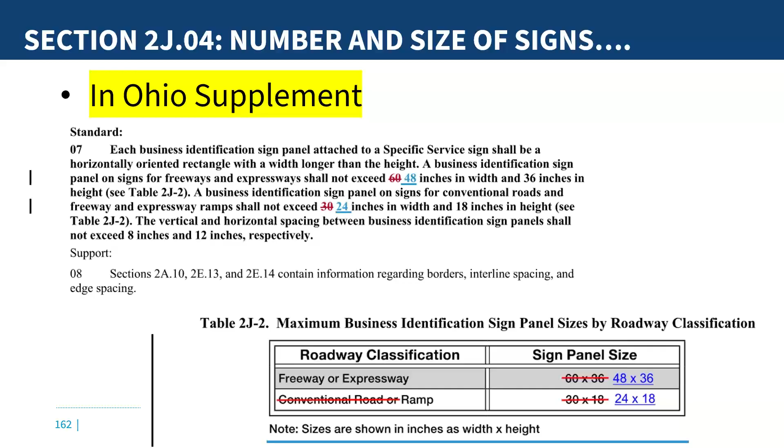Also in 2J04, another thing in the Ohio Supplement, we have some differences here in Ohio with regard to the sizes of these signs. It shows the Ohio specific changes. We also have some Ohio specific language - we changed this over, making it a little more stringent, from an option over to a standard requirement, about the specific service ramp signs and displaying distance. It's not an optional condition, it's a requirement. So we strengthened that a little bit in that particular section.

In section 2J11, we just added some info about some of the intersection signs associated with these logo signs. Then there's a reference for support information to our tourist-oriented signs, directional signs, which we're going to talk about here shortly.

Finally, in 2J12, that section is talking about the signing policy. Again, because Ohio already has a policy in place, we updated our manual, our Ohio Supplement, to reflect that, and just got rid of some of the information in the national manual about the policy requirements, because we already have that in place.

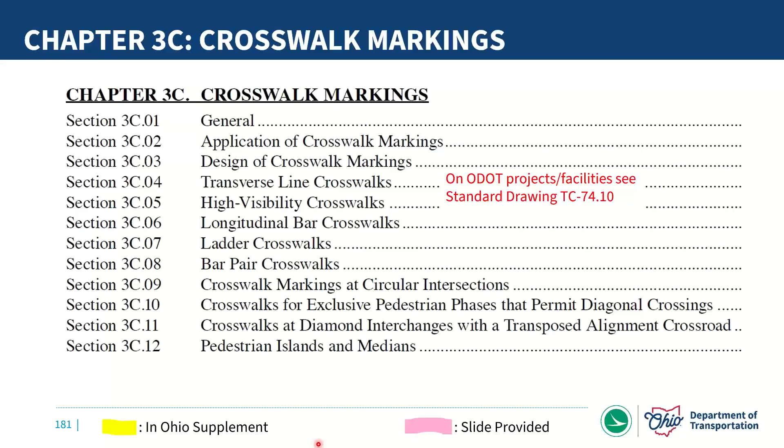Circular intersection markings. This gets into your roundabout type markings. We did not have any Ohio specific language here, so I don't have any specific slides to run through on this section, but definitely be aware, if you've got roundabout type projects, this is the place to go to find out more info on the appropriate markings for that type of intersection.